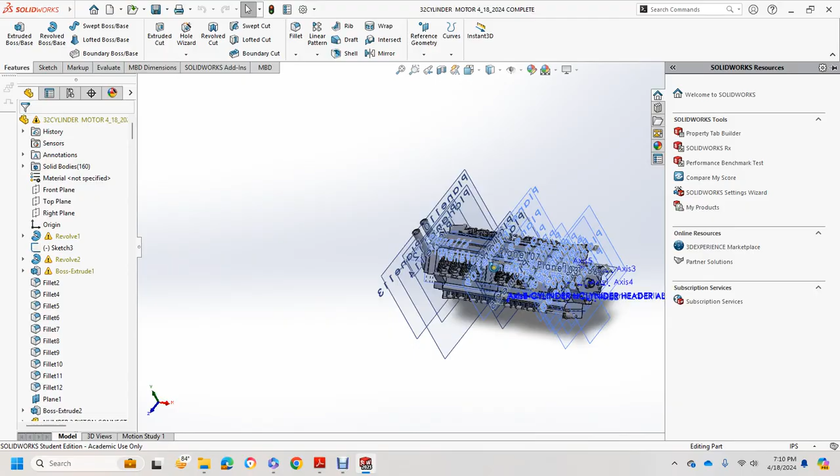Alright, hi, welcome to my X-Type motor for a diesel engine locomotive. It's 32 cylinders. It has 8 cylinders on each bank, 8 cylinder length bank. Each head block has 8 cylinders.

Zooming in on the front. Alright, this is upright position. Scavenger highlighted in orange here. Scavenger, timing pulley belt, water pump over here on the other belt. These are the pulleys on the corners.

The cones are turbochargers. This link path right here that's orange, a little line goes into the head bank. Those are turbochargers, they take the turbochargers into the air intake manifold.

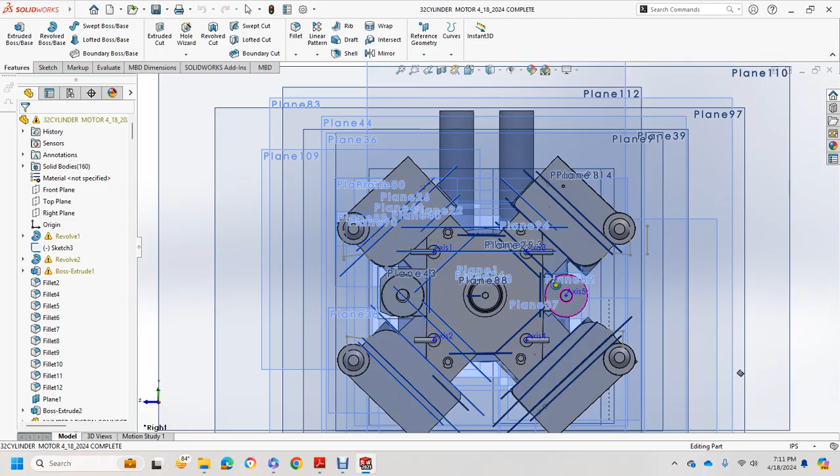So here's the governor in the front, and then we'll show you what the governor looks like. This is the governor. We'll look at the cross section now.

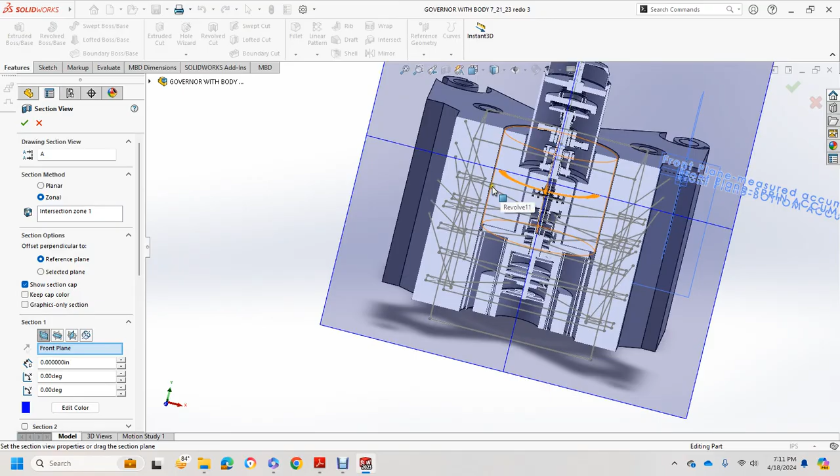So this is the middle, and we have the stem, and then the accumulator pistons come in these oil paths, and then they fill in the oil. There's a workaround float, and then it goes over here and fills with oil.

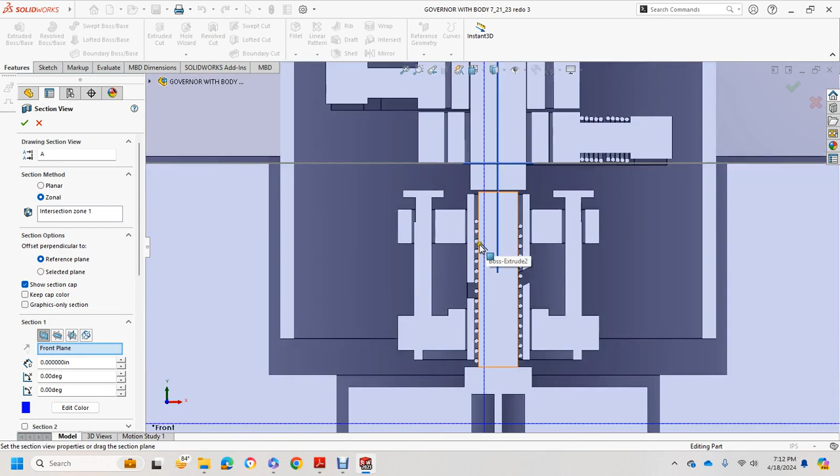And this is timing spring belts. You can see the springs, and then these are flyweights, and then this is a pressure crankcase regulator adjustable by this nut right here. And then on the drawing you see 4 control stands.

So over here on the more right, it's a little bit different incline. You see the accumulator pistons, power piston, the different blocks and the sleeves.

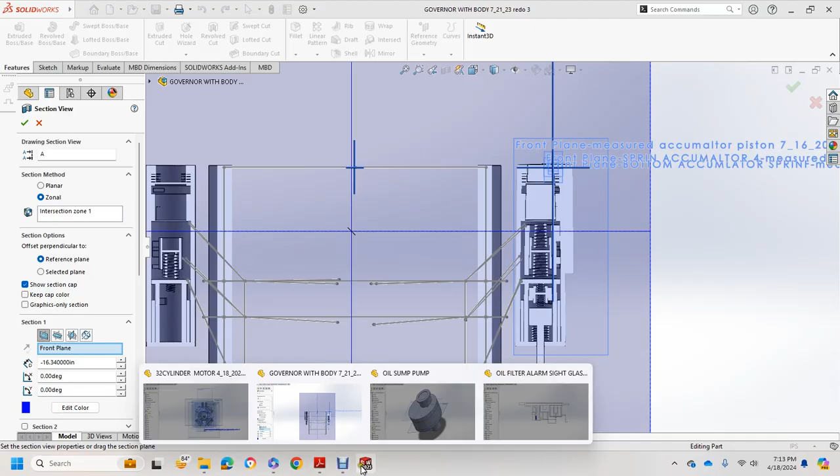And then we're going to go back to the X-type motor. I gotta close out of section view before it does that.

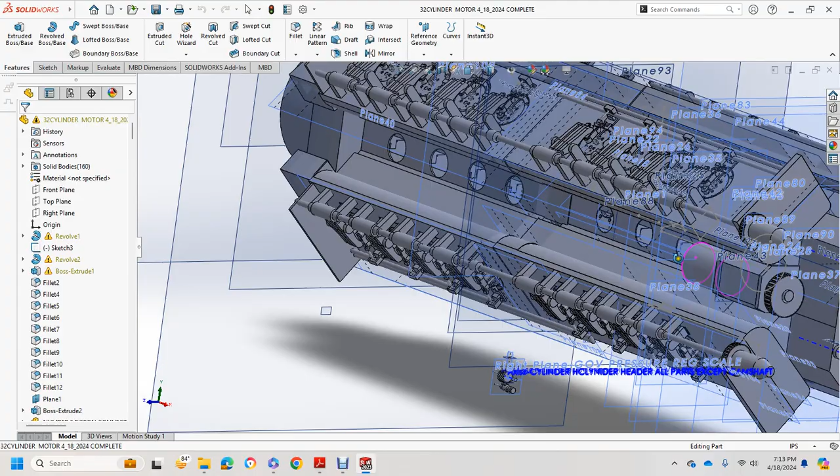Okay, so here's the X-type motor. It's got cylinders over here, water gear. This one on the left is the oil. This one on the right is the water, and those are going to fill each of these wet banks. I couldn't shell it, that's a property that it wouldn't.

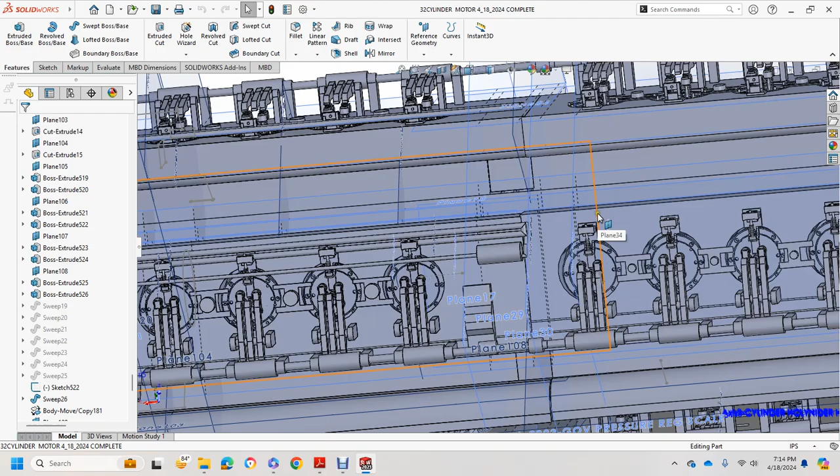Right now they're suppressed in the other banks, but they're there. Sweeps 19 through 25, which are your oil and your water sleeves, oil jumper and your fuel line in returns. And then you have your camshafts, rocker arms, crab bolts, rocker arms, springs.

This is your throttle linkage right there, and those are done 4 times over. And then we're going to look at the back. This is basically another way for the combustion to go out the exhaust tubes.

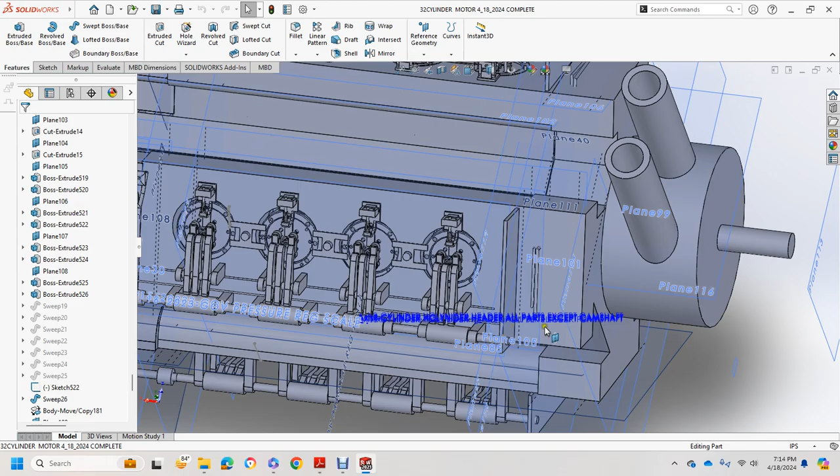And then this is the drive, it adds to a coupler. I'll show you, let's go to the right side here. Alright, this is... we'll go to the left side then.

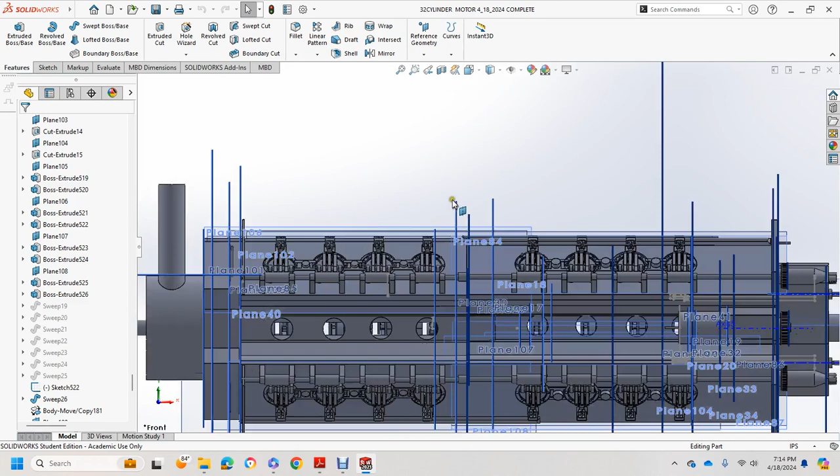Okay, so here is the X-type motor to the side. I'm going to show you my original scratch drawing. So we have the pressure plate and the scavenger pump, the oil from the governor, and then that goes into

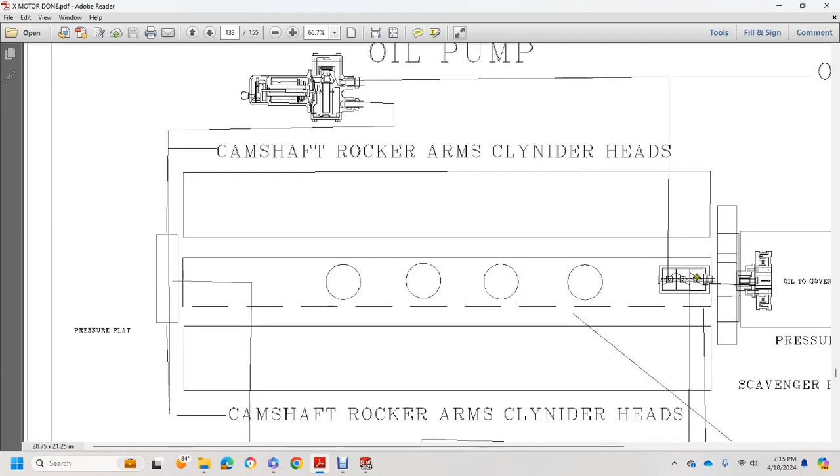that scavenger pump. Then it goes into an oil pan and oil sump drainage, and the oil pump slide alarm comes back up the oil lines in the back, and then it goes up to the fuel oil pump on the top head cylinder. So I also did these, but they're not inserted in the drawing because the drawing is really worked out.

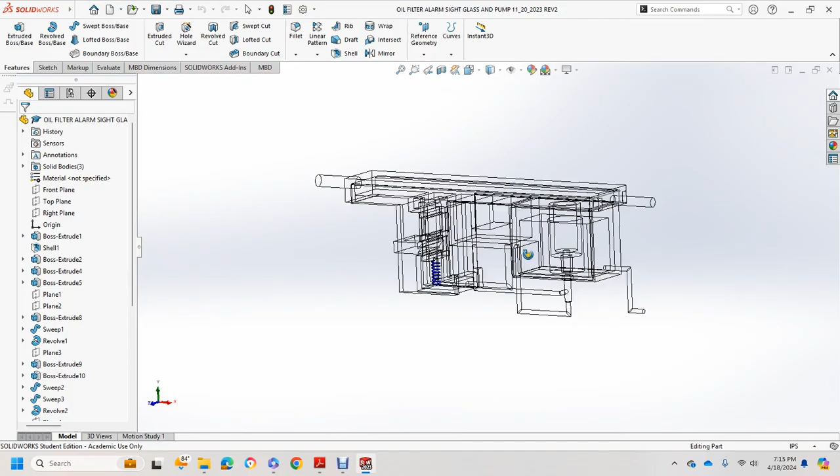So this is basically an oil filter with a fuel pump, and then over here is a switch. So if the oil runs low, it will shoot, and then the sight glass, which would be in this column right here, and we'll just we'll go

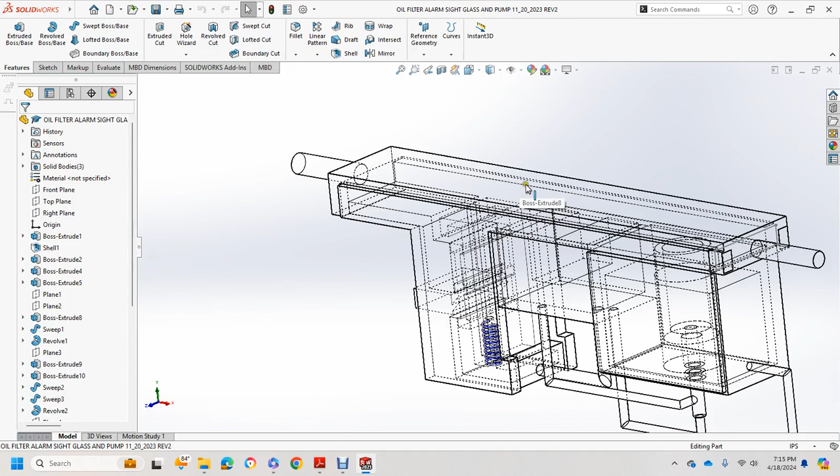This is 3D here, shows the lines coming out. We'll also show you the oil sump pump section. This is basically in the oil pan. It sumps it up to the back, and then we have the governor.

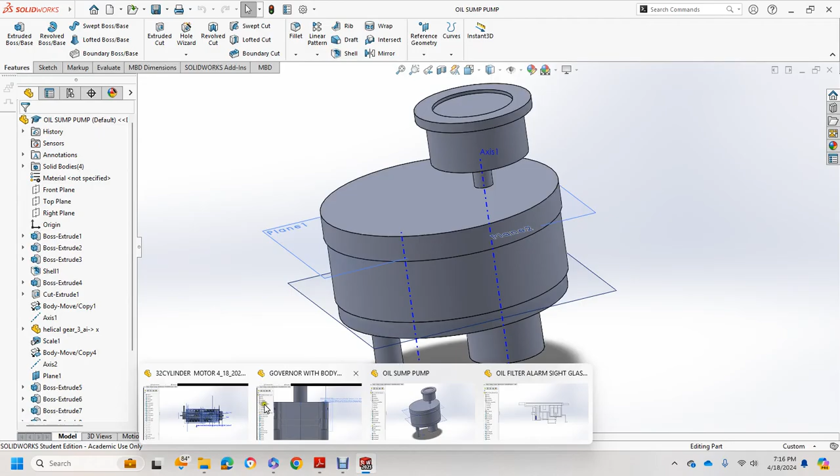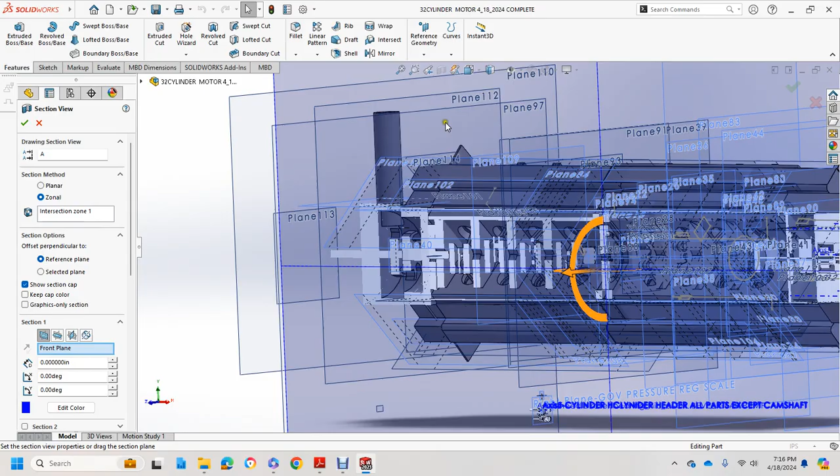So let's do a sectional view. We'll start from this end. So we have the back rear shaft, which connects to the coupler of the main generator. We have an exhaust room, one fan, two fans, a block, a pathway from the exhaust to the fan belt.

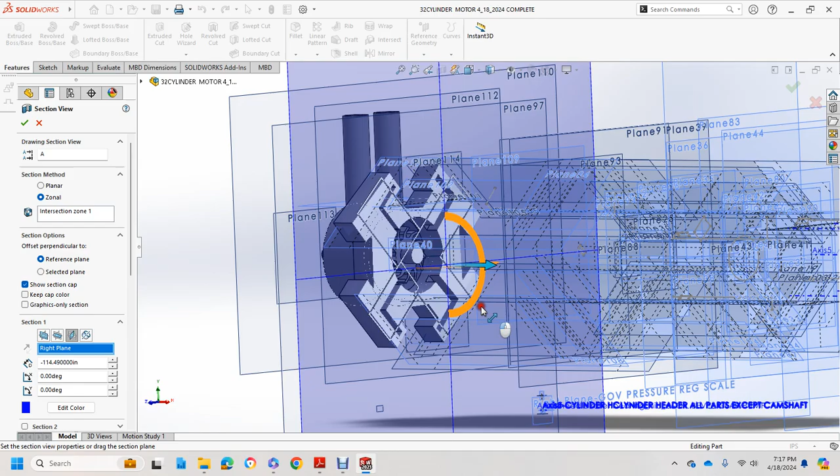And then it goes into these thin lines are your fuel lines right there. These are the fuel lines that run to each bank. There's also an oil line. And then once you get to here, we start reaching the end of the rear of the head block.

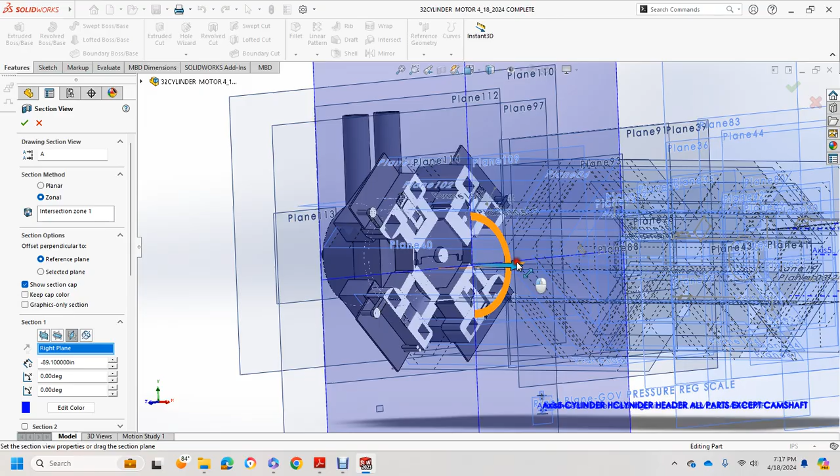Well, this one, the intake is stopped by a wall, but the exhaust goes into the exhaust. Then we have a bearing journal of the shaft, and these are the upper and bottom bearing journal. We come through, we hit cam lobe number 1.

So you see the cam lobe, and the pocket inside the cylinder liner, which fills up back into the air intake over here. That's cut extrude 11, and that's on every cylinder bank. There's 4 valves to each header.

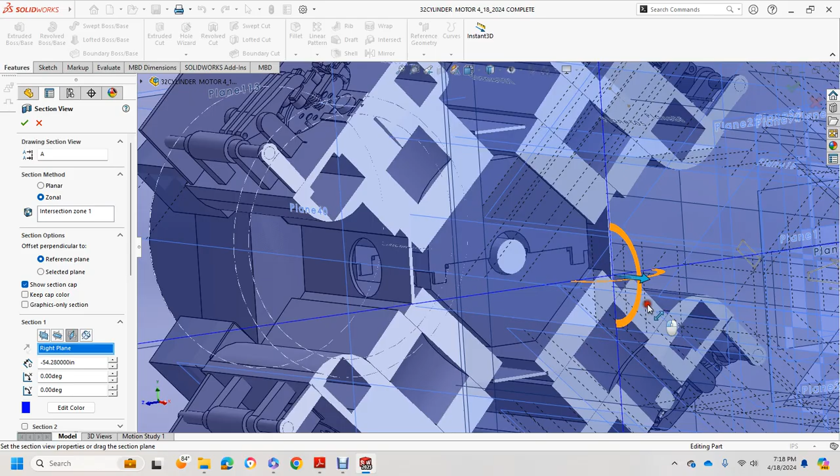And then we keep pulling through, we move on to another rocker arm, and then we move in. This is so we're getting 4 cylinders a bank.

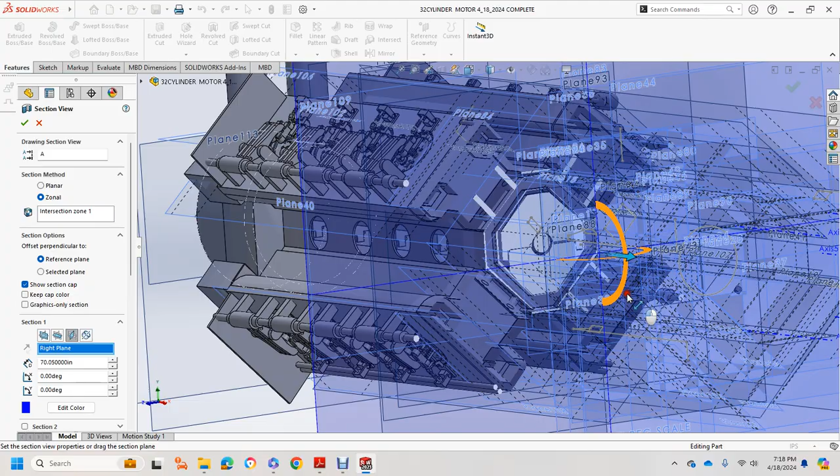Each block, and then as we move forward, there's a slight gap in between here where it picks up a frame. That's the frame, where the head backs are screwed on. There's also a middle part to that, so it's framed in the middle as well.

And then I believe we should hit a harmonic balancer. This right here, there's your harmonic balancer. There's 4 plates in that. And now we basically got our 4 cylinders.

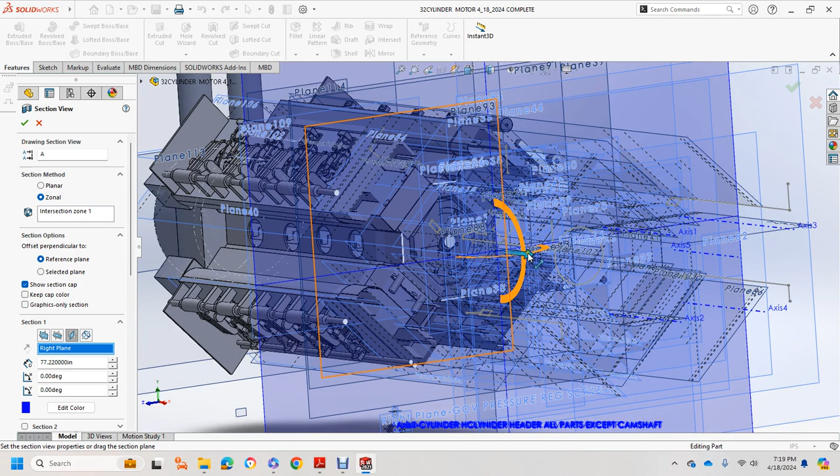I did mid saves from the original 4-cylinder X-Type motor, so I basically worked from that. And then we reach more sectional views, and then...

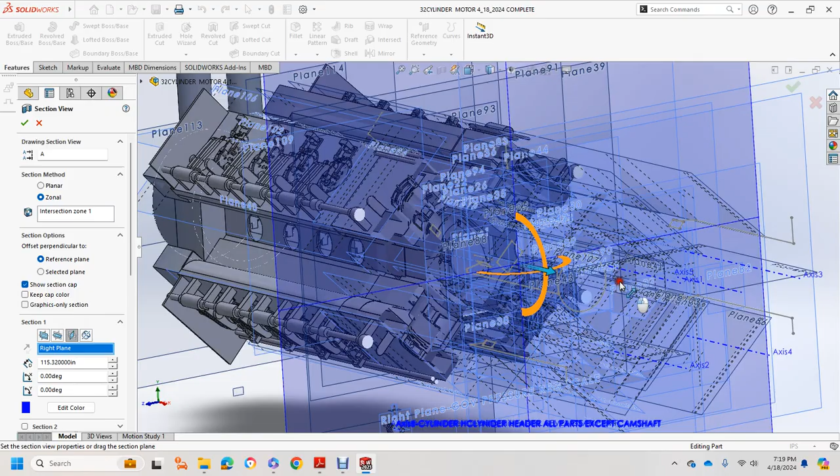So back up to speed, up to here. We reach the cylinder liner rocker arm.

Now here we see the scavenger pump, which is oil bevel gear. There's a few oil bevel gear. There's mounting holes in the back, so you put the gear inside there, and then that comes out. And then it has a cage around the harmonic balancer.

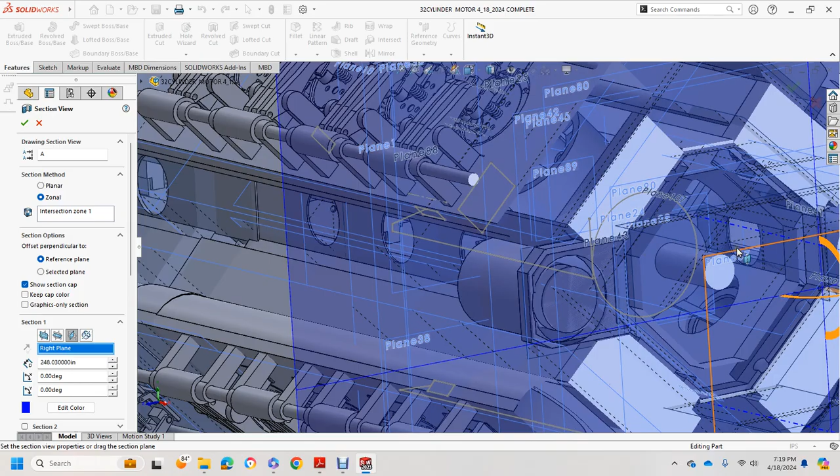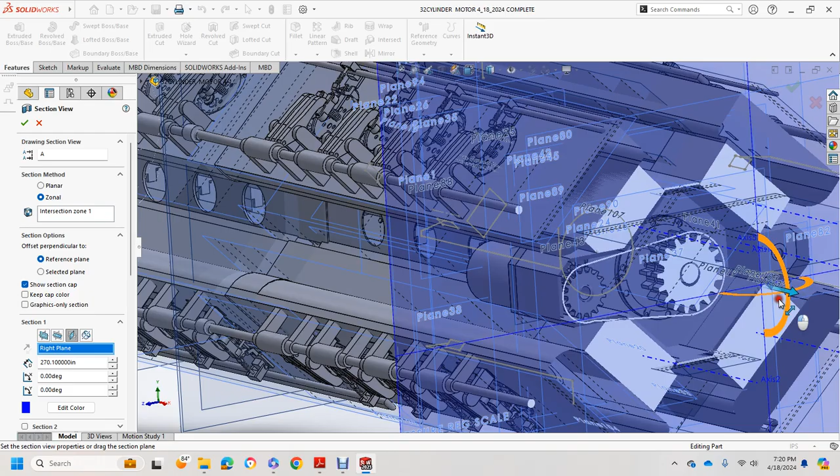So we did a frame from the scavenger, and then it goes into harmonic balancer, and then there's an internal gear which turns this on a chain, which I doubled up just in case there should be any problem with tightness and the control of that belt. So that's shown by a generic belt that I drew. I don't know how to use the belt feature yet.

And then it moves into the governor, and then faces up that way. This is a little awkward. I had to scale it down, or it's a little off scale, but we have the drawing.

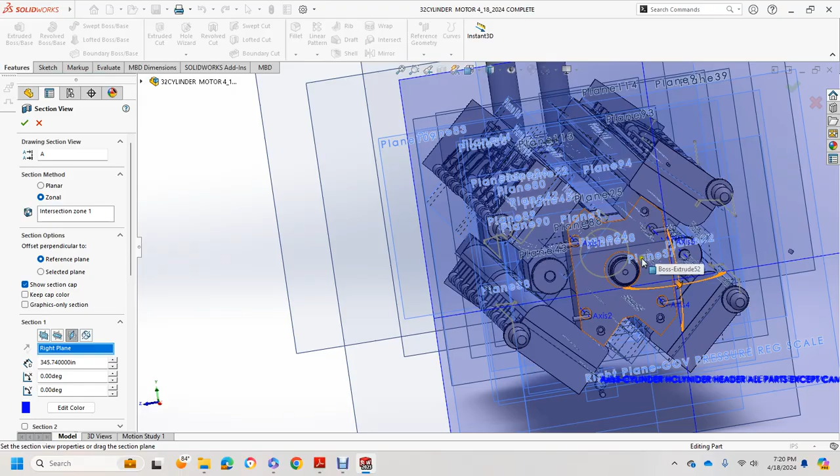It's right here. We showed you that drawing, so here we go. We showed you the governor, and basically that's that. And then you see the turbochargers are left blank.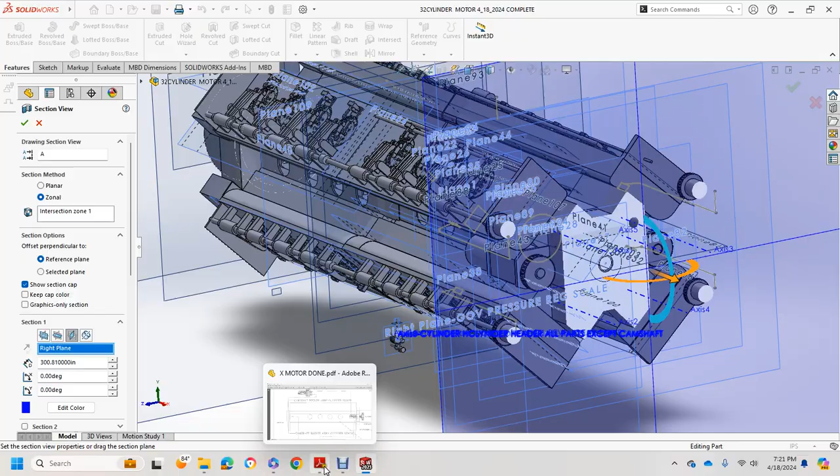So here we had the oil pan, the oil pump sight filter, alarm scavenger pump, pressure plate. I use this lubrication oil pump GAM. There's going to be a pit in the frame, so I didn't draw the pit.

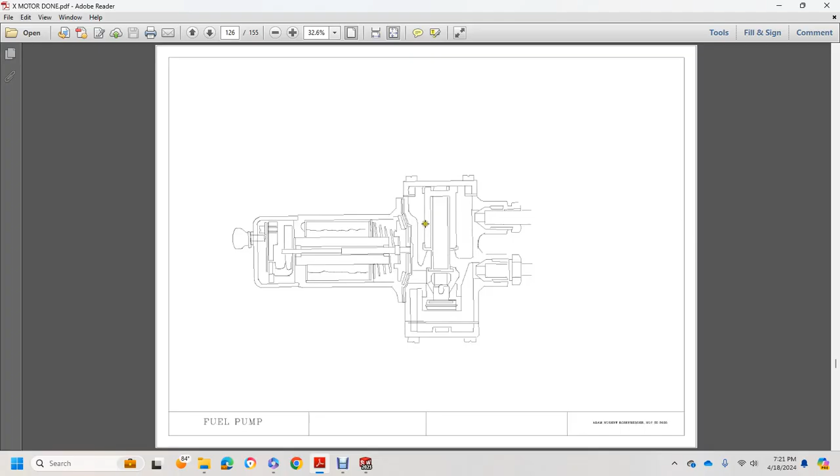This is a fuel pump. I'm pretty much going to use the same generic fuel pump that I got from this figure offline. So it's got a return in oil filter, and then this is 4-cylinder.

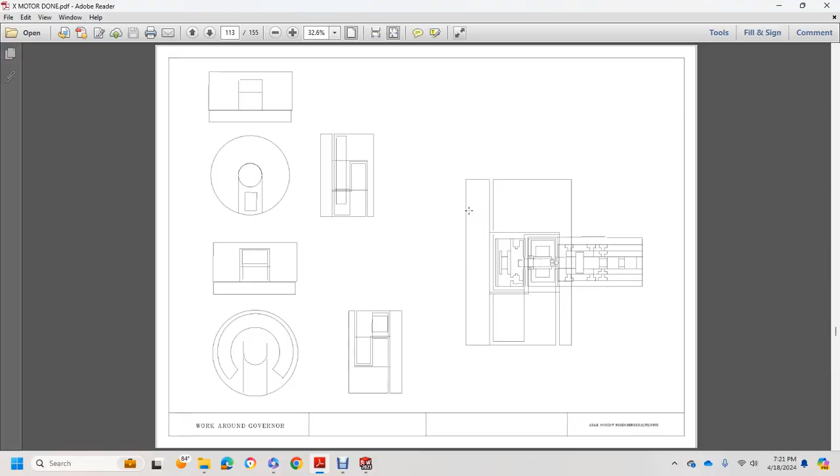This is a picture of the governor by itself from the side, and then the accumulators, fly weights, oil pump, fuel sight filter.

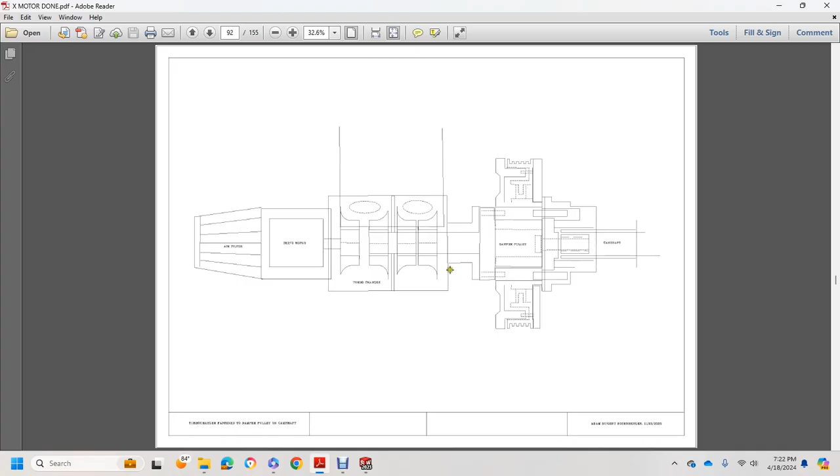And then you have the fan blower. There might be a little hole. This is only an extrusion. It's a cut extrude that I would have to draw 4 little holes and then cut extrude.

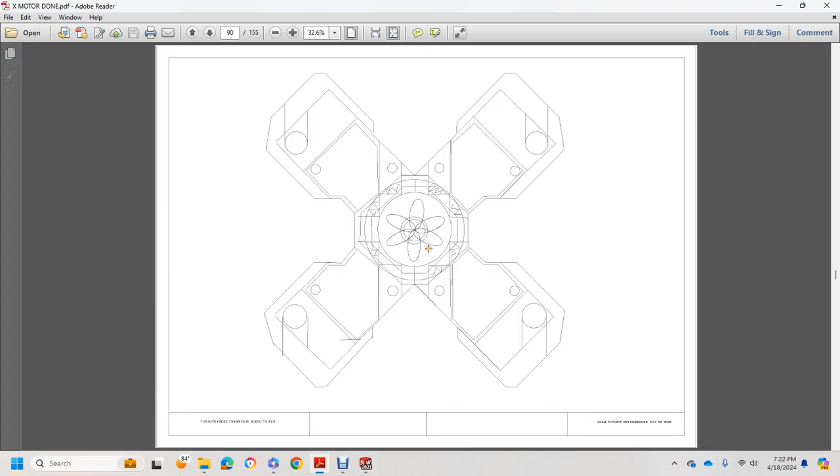But right now, that would go into the piston pocket into the liner, but I'm not sure how that bleeds. Also, there might be a rib in between the intake and the exhaust valve port for each line. Haven't really learned how to do ribs yet either.

Basically, the camshaft is done by a 2-stroke timing. So that's pretty much that. So here is the camshaft engine.

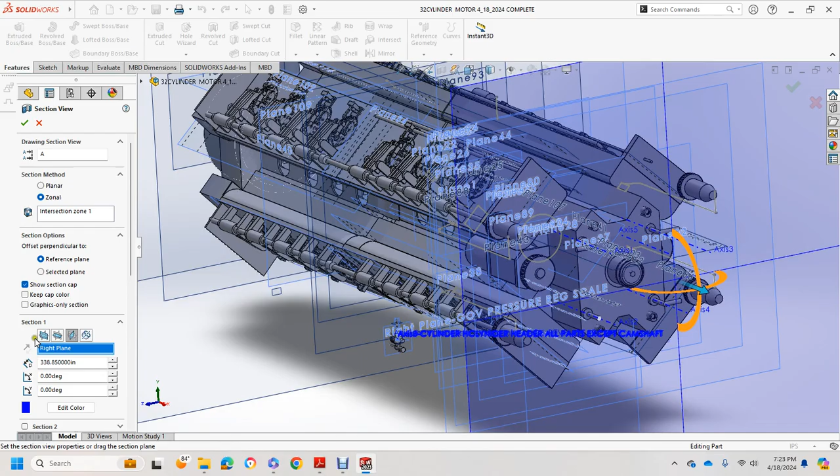Let's flip this this way. Maybe get a better look at this way. So now we're looking at an angle. We can come back, we're at an angle.

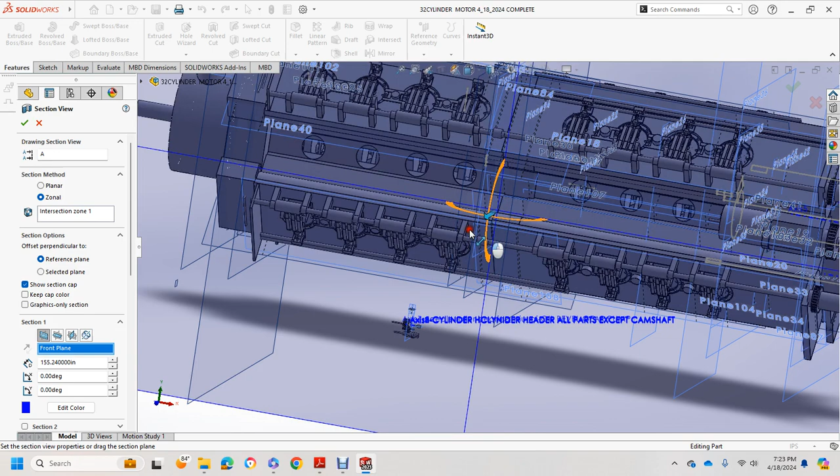We have camshaft rockers. Shows that, and then it gets into the drivetrains. So yeah, this is the X-Type diesel motor.

I did a little smaller exhaust fan on the back with 2 exhaust stacks, and it has 2 exhaust fans on it, one reverse, one flip the opposite way.

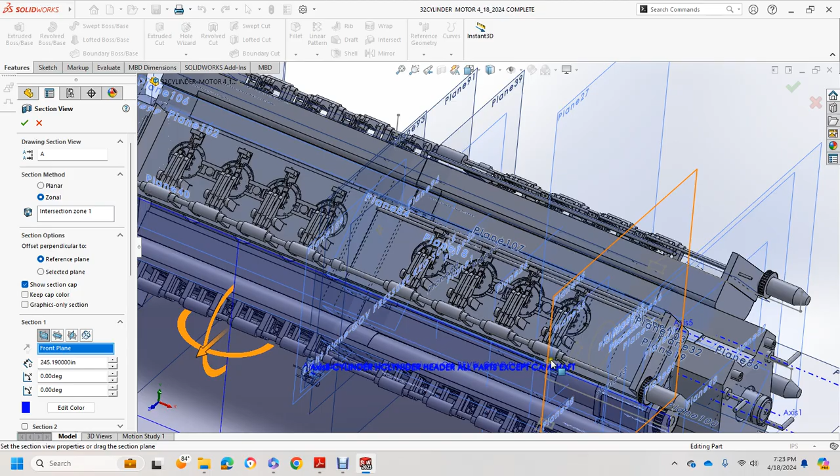This right here, this line right here from the turbocharger that I'm tracing, those are on each of the turbocharger. They go into this little square right here, and then go into the intake bank.

And that covers the X-Type 32-cylinder motor. Thank you.